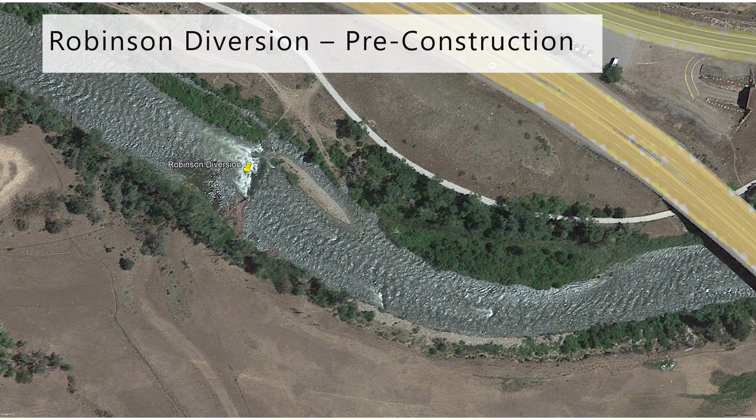The number one goal here was passage for boats. A lot of the longtime guides refer to this as Anderson Falls, and many either did not run this stretch because of the structure, or they would stop upstream, let their clients out, line the boat through, and then get back in. They just didn't want to risk tipping.

A lot of them had stories of tipping clients in. You all should go to the Healthy Rivers Board website - it's actually a feature project on the Fishing is Fun website as well right now. The county put together this great video of the project, and a star of that is John Ely, the Pitkin County attorney, who tells this great story about him and his family getting stuck on it in a canoe with his kids. He's a great storyteller - I can't do it justice, but it's worth it, and it's one of the reasons why the county got involved in the project.

Then we went out and did some velocity measurements, and we do feel like most fish are getting through here, particularly the trout that are in this stretch, but the measurements we made were kind of below the CPW fish passage metrics that they provide, so it may be a partial barrier for fish certain times of year in their life cycles.

Outside of the blockage area, it's just kind of an unstable structure - basically just a pile of rocks, and it would move every year. It would collect woody debris, ice jams would get caught up on it. It's just kind of a hazard in the river, and it would change every year. As a result, the ditch company would need to go out and do maintenance, with all the impacts associated with driving out in the river and moving rocks and cobble around.

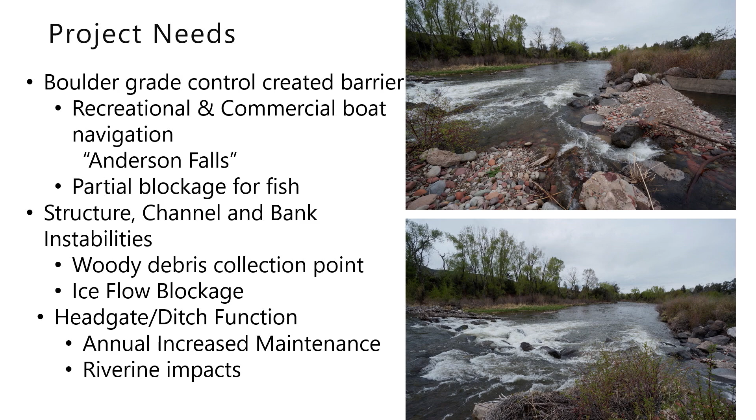So I got some photos of pre-project. This is low water in early 2017. As you can see here, it's just a pile of rocks, and there's really not a whole lot of ways to get through this section.

And then this is river level. Again, you can just see that a lot of times there was not a line through. Sometimes it was better than others, but most of the time you couldn't float through this stretch.

One of the reasons the stakeholders wanted to get this project involved - for those who aren't familiar with the Roaring Fork boating community, there's a lot of pressure from Carbondale down to Glenwood. They felt like if they could get this stretch open, the 4 or 5 miles floating through here, it might relieve some of that pressure down valley.

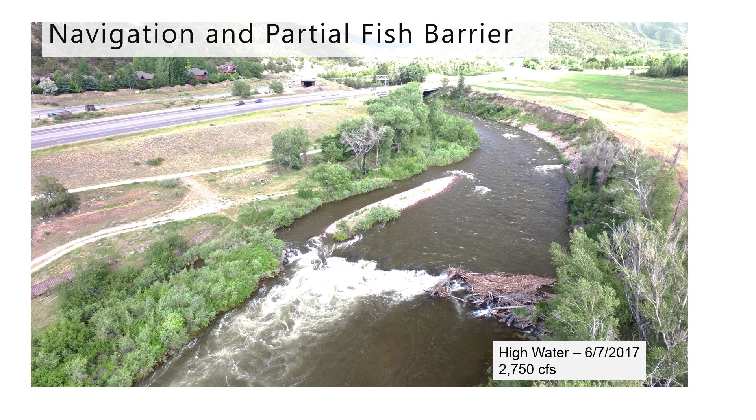It just collected a lot of debris, particularly on the left side, on the outside of the bend. There's rocks that were sticking way up out of the water there for no real reason. They would just collect things, and over time that would build up across the structure.

This is kind of river level, and as you can see there are passages through here, but you definitely needed to scout ahead of time, because if you picked the wrong line, you could end up on a pour over a boulder or something.

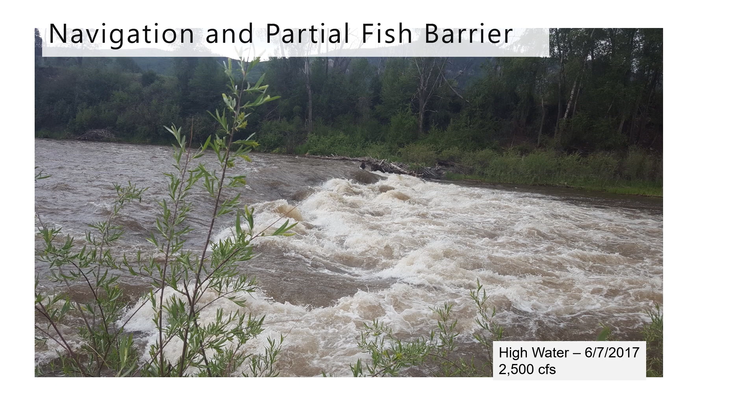It's worth noting there was a big flow event in the valley in '95. In fact, part of Two Rivers Road fell into the river upstream of here, and so we think a lot of changes happened then.

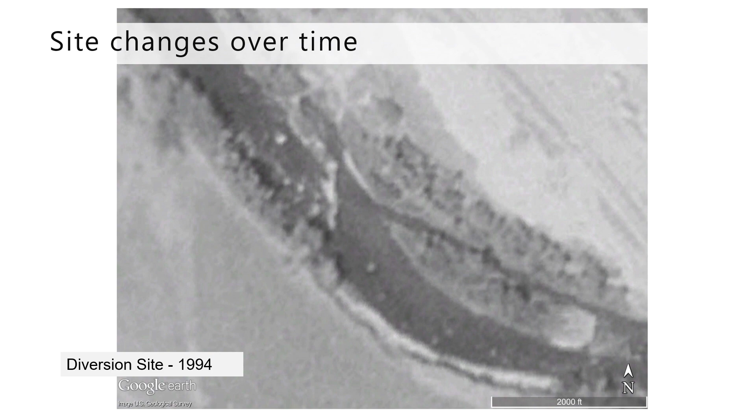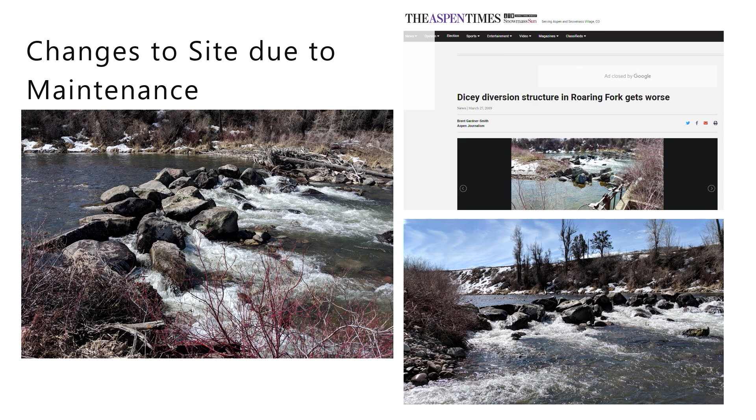The one I wanted to highlight was this strong relationship with the valley irrigators. The Pitkin County Healthy Rivers Board and the stakeholders really wanted that connection, to show there's a lot of structures in the watershed and region. They wanted to show you could work with these irrigation companies, the aquatic biologists and the recreators, and develop a project where they still get their water, but the project itself is a benefit for everybody else. It doesn't need to be one purpose.

So we kind of view this as a pilot project for the area. Particularly, this was a high-vis project on the main stem of the Roaring Fork. A key part of this was let's get this project done right and use it as an example.

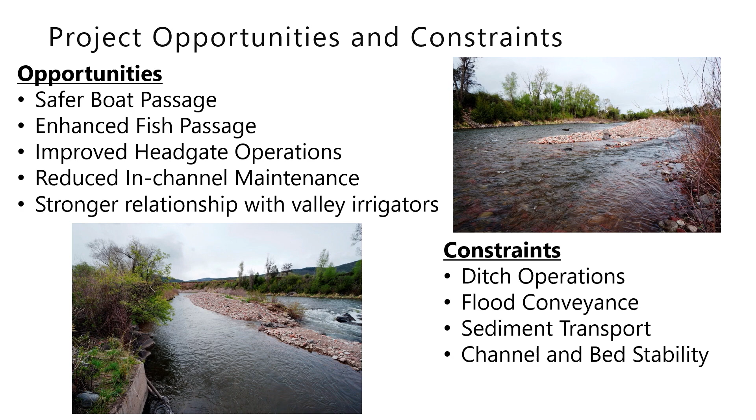If the irrigator did have to do maintenance, he could go out with a template to follow, so he's not just digging huge holes in the river and then it not functioning when he's done. In between, we put an engineered riffle. The nice thing was the slope we achieved matched a lot of the riffle slopes upstream and downstream, which is important for sediment transport and long-term viability of the project.

Obviously things will change—this wasn't designed to be fixed in place, and it might adjust over time. We did grade a thalweg in the middle to help promote that. We wanted that deep water passage for boats, totally open so people could float through there. And then we put a lot of habitat elements, which you'll see in later photos, on the sides—not only to provide flow diversity and refugia, but also to help with bed stability along the banks where it was more important.

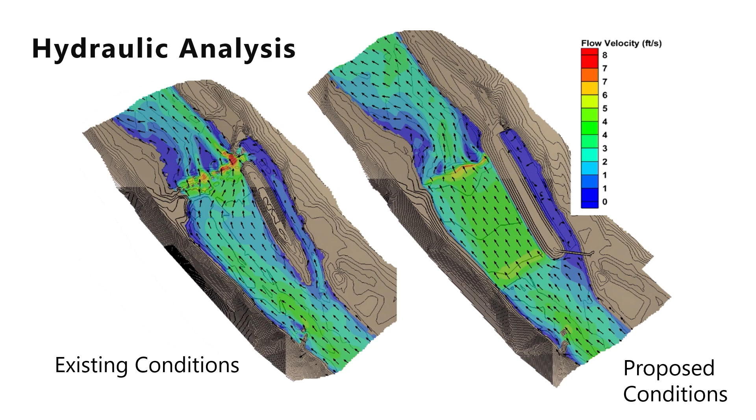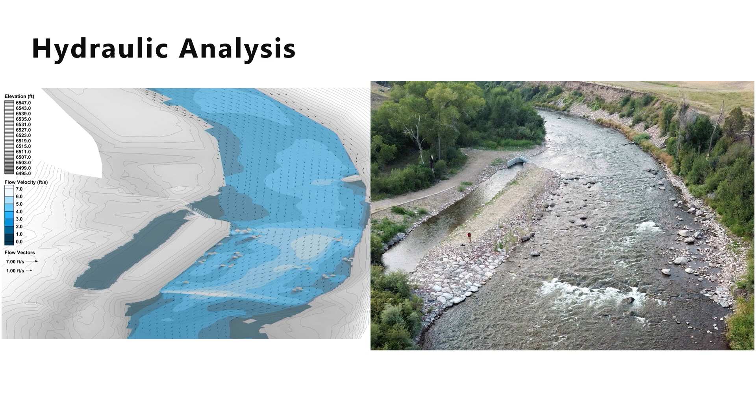This is the same flow rate and everything, and you can kind of see there's higher velocity down here as it goes over that bottom structure, and some higher velocity here as it goes over some habitat elements we put in. So we were happy with how this turned out.

So I have a bunch of construction photos. As I mentioned, Brian Berrickman did the construction and digging at Riverworks. I think more with river projects than other types of civil projects, it's really important to have a contractor you can work with and trust, because you're not out there every day, and there's a lot of things that come up during construction - turbidity management and all those things associated with river projects. So having someone who knows what he's doing is important.

Brian recently upgraded his equipment to be machine controlled, and you can see the GPS heads here on the top of his machine. They actually tell him in real time, whatever tooth he's got on his bucket, where that's at in the project. We provided him with a 3D mesh of the project and all the line work, so he could go out there and place his bucket and know exactly what material it should be, cut fill quantities and all that.

It was super helpful, really helped streamline the process because it took a lot of the guesswork out. There was almost no instance of him finishing something, us going out to look at it, not liking it, and having to tear it out again. It really helped with quality control, and put us more in a construction observation role versus going out and checking every last thing he did. It also helped with measurement and payment - it's way harder to hide extra boulders and things, as contractors tend to do.

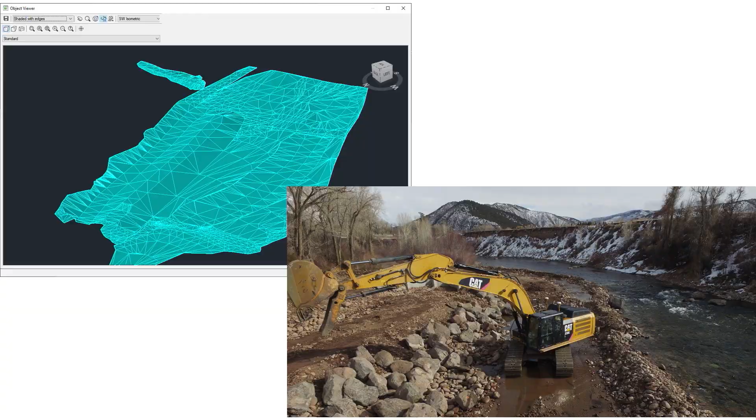So I have a couple photos of the construction. This is the first stage, where he's doing the river left. He actually routed the entire Roaring Fork River at low flow through these culverts. We did wintertime construction, which has a lot of advantages for river work - you're almost guaranteed low flows, and the freezing temperatures help with erosion control and care of water and turbidity.

Of course, I'm not out there working all day in 10-degree weather, so I can say that sitting here. One downside - you have to be careful with standing water in alluvium, because that can freeze overnight and then can't move it the next day. On the Roaring Fork there's always the potential of an ice jam event - up in Snowmass Canyon, when it gets really cold, ice will form, then you get a warm week and it flushes down into Basalt. We did have a small one during construction, but not too bad.

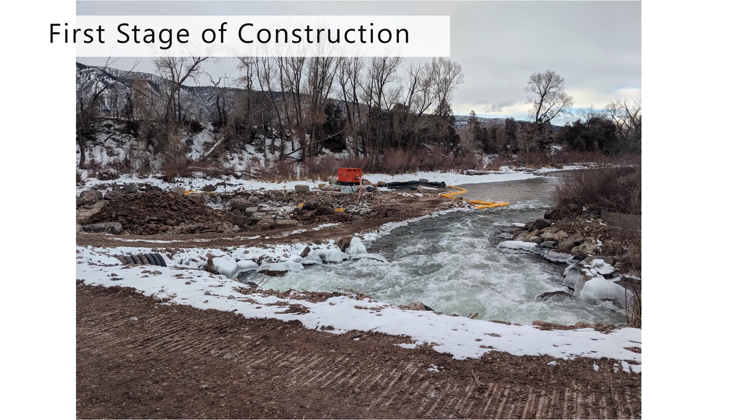That's helpful because, as you guys know, importing boulder is getting very expensive, and it's almost cost prohibitive on some projects.

We tried to minimize the amount of boulder that we imported on the project and use what was there. And the nice thing was on this project, we had a lot of material. And then Lisa somehow has a collection of boulders, she's like, oh yeah, I got some in this yard over here. That's always helpful too.

You can kind of see, so this is where the river was. So he's pulling these culverts out right now. And this is where the channel was during that first stage. He's pulling this apart and flopping the river over.

I imagine most of you guys at this point use it, but there's a lot of drone photos in here. With drones and river work, it's pretty amazing how helpful it is to get up a couple hundred feet off the ground and look down. I'd recommend getting that involved in your project development because it really helps tell the story to fund stakeholders and fundraisers. So we end up using it a lot.

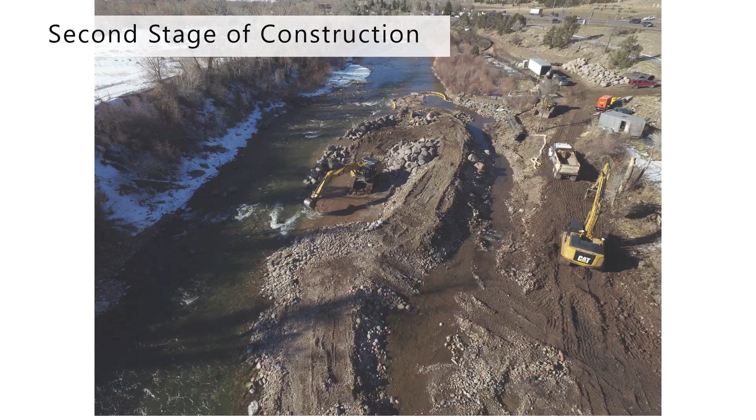So that's a giant hole in the river that we put this thing down in, and most of this is going to be buried, but we wanted it to be structurally stable, and then if scour or things occurred during a high water event, we wanted to make sure it didn't get undermined.

Wintertime construction kind of helped with water coming through this cofferdam because the concrete basically had to cure for 30 days. So Brian had to use dewatering and all those things for 30 days, which is a long time to keep something like this dry when it's that far below the riverbed.

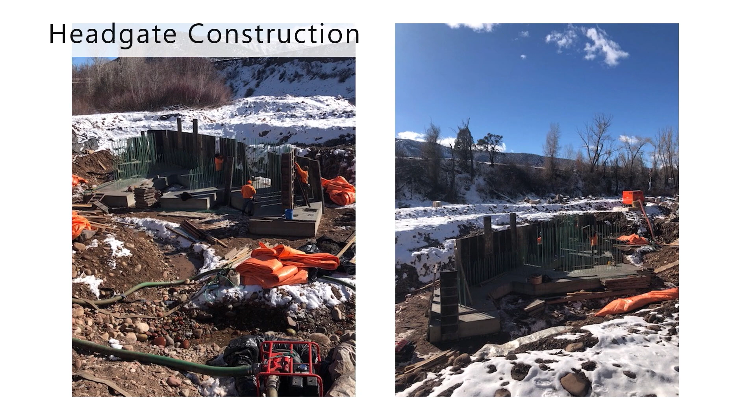One downside to pouring concrete in the wintertime is he had to use, for the first couple of weeks, heating blankets to help with curing. So he's got some good stories of being out there at 2 in the morning with the river like 10 feet above his head, trying to check these blankets to make sure they work. So there's downsides to wintertime construction.

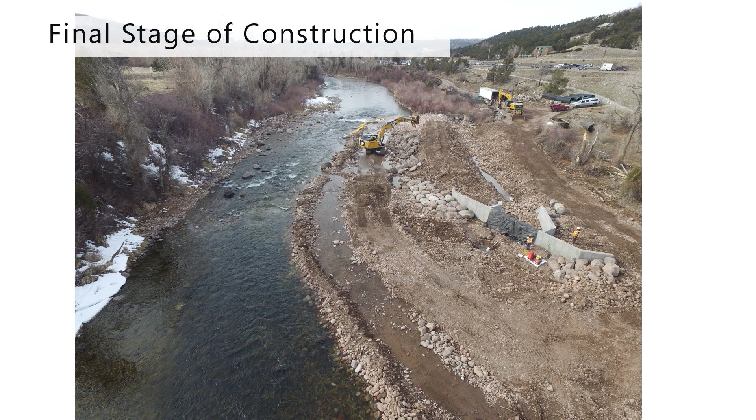And so this is that final stage. Basically the river work is done. He's got an alluvium cofferdam in there just to help with turbidity. The structure's done and backfilled, and he's working on this, what we refer to as the island, in between the ditch inlet and the river itself.

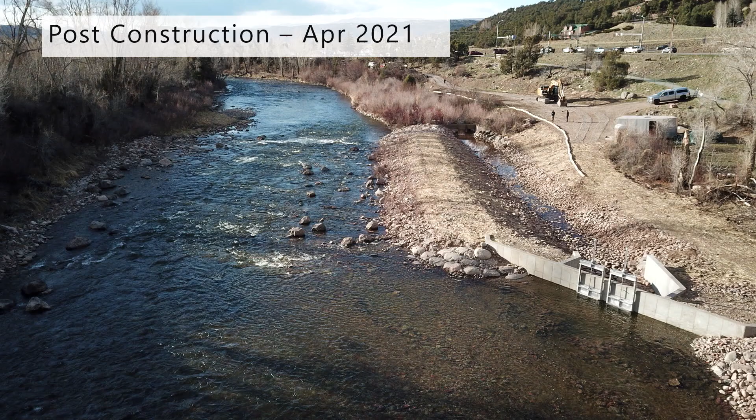Just because of Pitkin County's dedication and also some of the permit requirements, they committed themselves to a 5-year monitoring effort. Every year we go out and take water surface measurements during runoff and through the hydrograph. In the fall during low water, we go out and survey cross sections through here. It's been really interesting, from my perspective, to be able to formally do that.

Like most of you, most of my post-construction monitoring involves me stopping on a road trip, which my wife really loves. So I want to thank Lisa for helping me with our relationship as well.

It's been nice to be able to go out and see what this project does and how it's changing over time. So this is just after construction, and Brian's up here cleaning up right now, finishing up the staging area. There's all the willows and everything planted there, but you can't really even see them yet. And they haven't even put water in the ditch yet at that point.

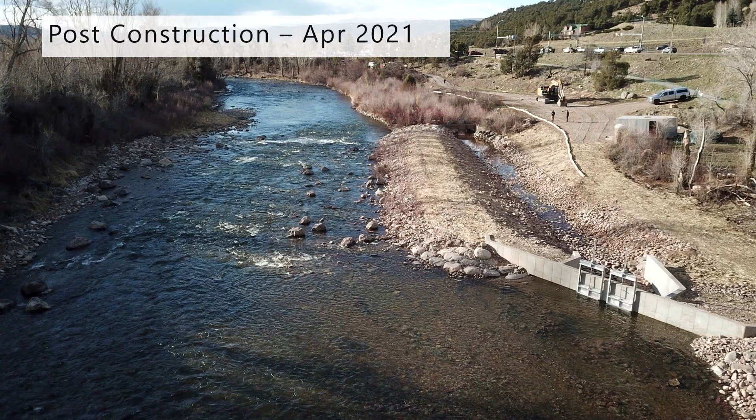Let me go back on the slide here. We tried to focus their maintenance just at the head gate itself. If they get sediment accumulation or debris piled up here, it's kind of on the inside of a bend, so these things tend to end up there. So we provided them with an access point where they can come down, it's all hardened right here, and hopefully not even put their tracks in the river, just reach down and pull out the sediment in front of the head gate. So the goal was to remove the need for them to be out here tracking all up and down the river and making big changes.

And my comment would be, I bet you don't need to plant anymore below. Yeah, it's going to find its space. I'm not a vegetation expert, but in the past, I think our goal has been to get that water slowed down, and then you get seed deposit during runoff, and we just try to encourage it as much as possible, because we don't want this kind of big bare spot with the 3 to 1 side slope look. We want to get the vegetation growing, and I think it also helps shade the river, from a habitat perspective.

Yes, ma'am, what's their irrigation season? Yeah, it's pretty typical, like April 15th to October 15th kind of time frame. So that was the other advantage to working in the wintertime. We did not have to deal with that, because I'm working on other projects right now where we're having to deliver water during construction, which always presents challenges. The CFS to gallons per minute on a pump, that gets pretty big pretty quickly.